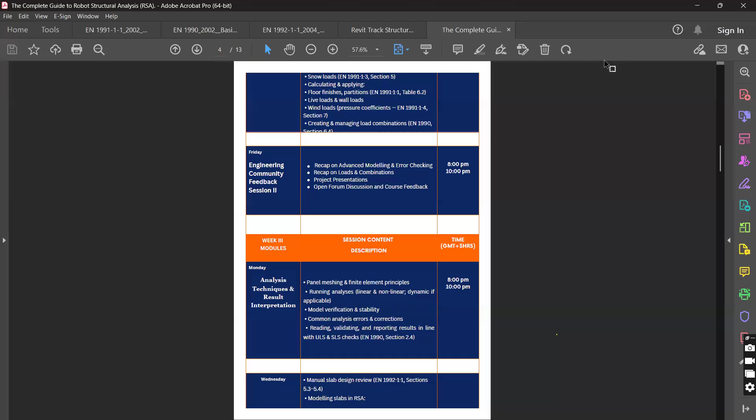Worry not about whatever you're seeing. So this is the Robot Structural Analysis software. I have 2026; you might be having other versions. It's all right. As we've said, it has very good advanced design and analysis tools. For example, if you're to go into buildings, you would use this purely for buildings, then frames and others.

But in most cases, with very complex structures that are composite in nature, having a steel part and a concrete part, you might find designers interlinking different softwares. And that is where the power of Robot comes in. There are softwares that only do buildings, and you can't use them to analyze moving loads or bridges, but Robot has all those capabilities.

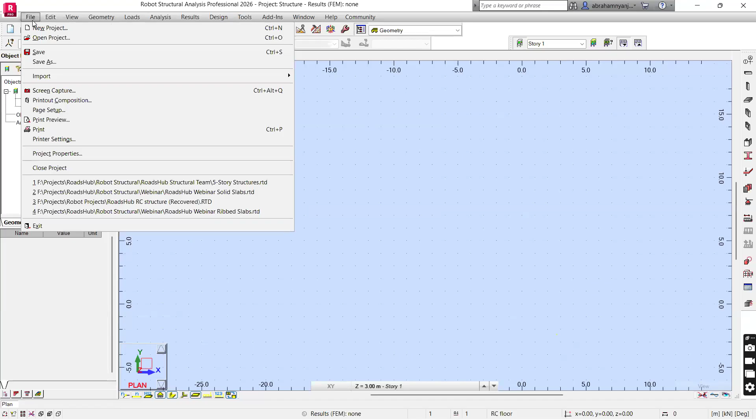Otherwise, for example, when you open a building and you want to model something that captures moving loads, you will never have moving loads within that. So you have to specify what you're going to design right from the start so that you have commands and settings that will match what you want.

Thank you so much. We shall have other engagements in future. We have programs that will be set. We shall cover concrete, steel, and move into various advanced components. So we shall be moving from one to the other.

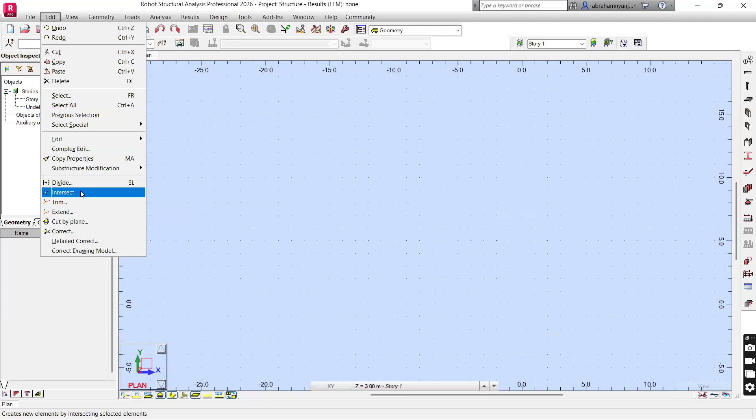So this is specifically if you're to work with a building. So the file edit is where you do the normal editing. You can copy, you can move things, you can divide, you can intersect, you can trim. So this is basically an editing. Whatever you want to edit, this is where the editing is done from. Whatever you want to edit in your model, it will be done from here.

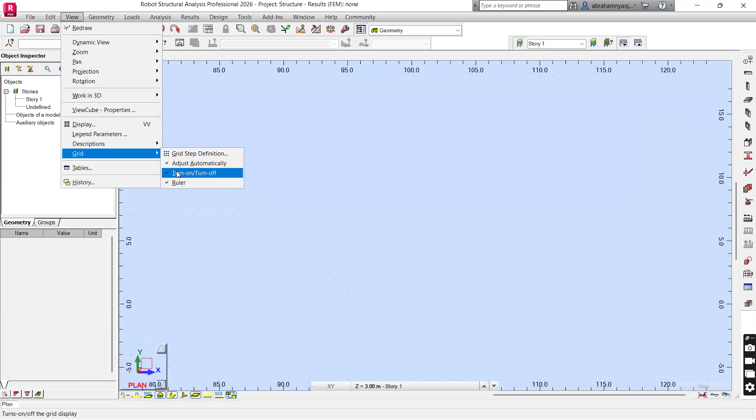So from the view, you can zoom, you can pan, but what is most interesting here, for example, if I come to grids, I hope you can see the small dots. Yeah, so you might not want to see the small dots. So this is where you get to turn them off, so you have a clear model space. The same applies to the ruler. You can turn it off from here. So this is where you get to change a few things within your model.

But as I said, the geometry, this is where all the modeling is done from. And because, for example, you can't place a column, then again come back to the geometry so that you pick another entity. That is why all the entities within the geometry are all right here. So you can see these are the grids, these are the beams, columns, floors, walls, openings, all of them. Most of them are right here. So instead of going back to the geometry to pick something, all you do is pick whatever you want right from here.

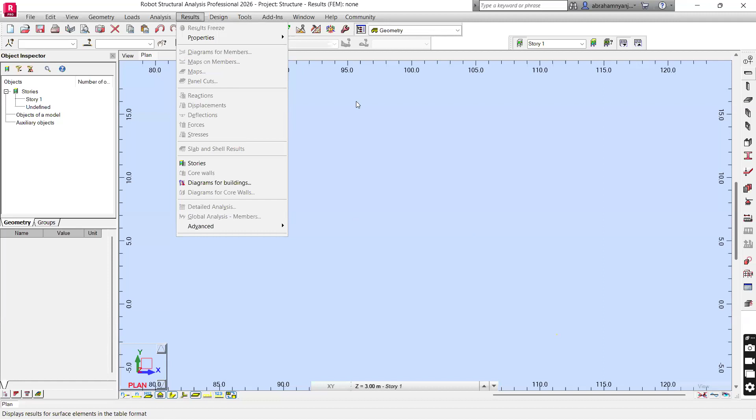Yeah, although the geometry is where we model from, all of them are available here to our exposure for faster modeling. So these others, I'm not going to go to them because you can see they are not activated because we have nothing in the model space, but we are going to see them one by one. And as we model, they will get activated.

In the tools, I'll jump these four because we are going to see them, worry not. In the tools, this is where you find the dimension lines you might want to dimension. And most importantly, this is where we get to change a lot of things. For example, if I go down to the preference, you can see you can change the language, change it to Chinese, but it depends. Your language might not be here, but this is where you get to change the language. These are the general parameters, and you get to organize the toolbar.

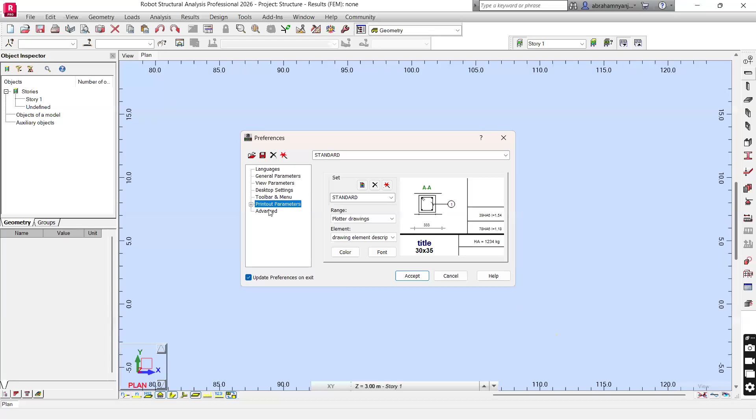What is most important in the tools is the job preference. Now, in the job preference, as we said, Robot is a very advanced software. It has over 70 design codes that are captured. Within the job preference, this is where you get to change the dimensions. You can see, as per the last settings I used, the structure dimensions will be in meters. The others are in millimeters, reinforcement in square millimeters, then the force in kilonewtons, meganewtons.

And now the database, for example, for steel, it is set to use the UK sections. There are vehicle loads, as we said. There are other standard loads, building bolts. And now when you come to the design codes, you can see steel, aluminum. If this is not the code you want to use, you don't want to use maybe BS or Eurocode, you can choose any other, for example, timber. So you can choose something else depending on the design codes you're working with.

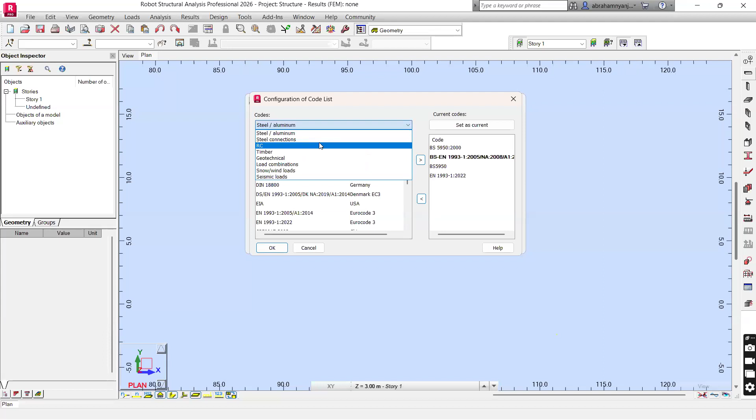For example, reinforced concrete structures. You can change depending on the code you want. So you can adjust, and then when you click on more, as we said, there are very many, so you can look for the specific code that matches what you want, for example, aluminum, reinforced concrete. There are very many. I'll leave them set as Eurocode. So tools, this is where you get to change the codes.

So now there's something I want us to model so that we make this interaction a great experience. So I have something small here. It's a structure.

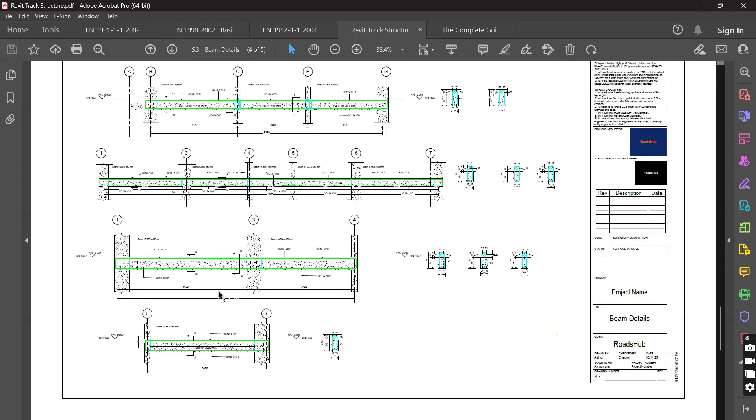It has columns of 200 by 500. It has beams of 200 by 450. So we are going to just try to replicate this within the shortest time possible to just show you the power behind Robot. So I'll go back to,

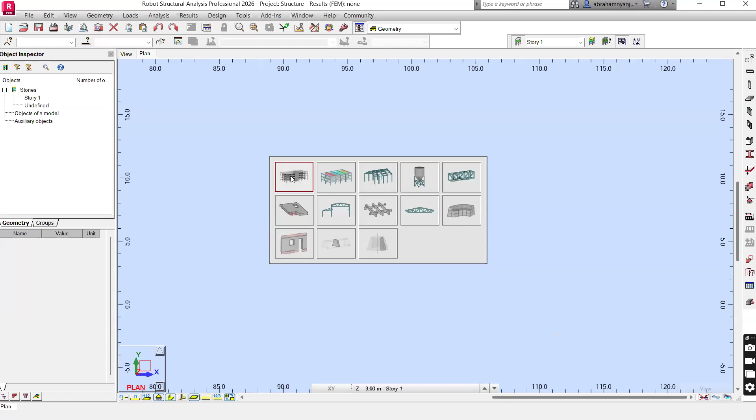So now every structure, as you've seen, it has grids. So as we said, when you go to the model, this is where you get to adjust everything. For example, if you're still not sure of what you selected, you have a chance to change it again. Geometry, then the structure type. You can change it again to match what you want. The axis definition, this is where we get to define the different grids.

But before we define the grids, because that is going to be our basis, I'm going to first go to stories so that I set the story height. So this is what I last used. You have your building base set at 0, 0. This will be the base of your structure. So you can define stories graphically or manually.

So for example, when you choose manually, you can set the story height depending on the structure you're going to design. It does not mean when you open the software you have the 3 meters. No, it will capture the latest modifications you did. So depending on what you have here, all you have to do is to delete whatever is there, put in your story height, then you just add it and you set it.

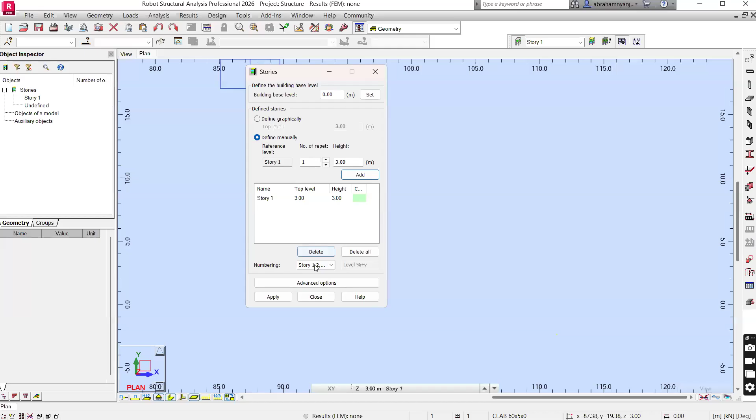So what Robot does, because even if you have 20 stories, all you have is to set one story, model that, check it. If it is okay, then you can use that story to generate all the other stories you want. So if we set it at 3 meters and you're good, just apply and close. So now what the axis does, for example, when you come to the Z, this would be the story height. You can see it is in gray color because it is already set within your stories. So now all we have to set is the X and Y.

But before we do that, you can see there are very many axes that you can use. I think most of us are familiar with Cartesian. There is cylindrical where you get to specify the angle, the radius, then arbitrary where you can just pick points. So using the Cartesian, we have the X and Y. Now, depending on our structure, this is where we get to define the X and Y. So literally what we are going to define are the different grids, representing where we have main elements.

So I'm going to be minimizing because I didn't open this meeting using the Zoom link. So I find I can't navigate easily.

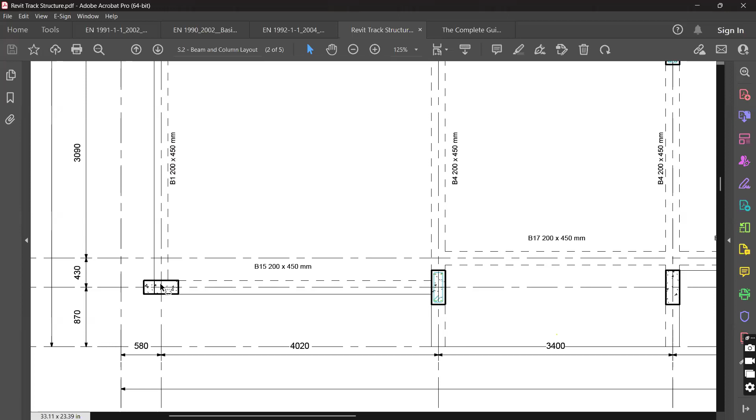So this is what we are going to do. This is the structure we have. I'm going to set the 0, 0 X and Y at this location. So if I set the 0, 0 as this point in Robot, all these ones in the X will be positive, and whatever is in the X on this side will be negative. For example, this 580 will be negative if I set my 0, 0 here. So all these grids will be in the positive, this one will be in the negative.

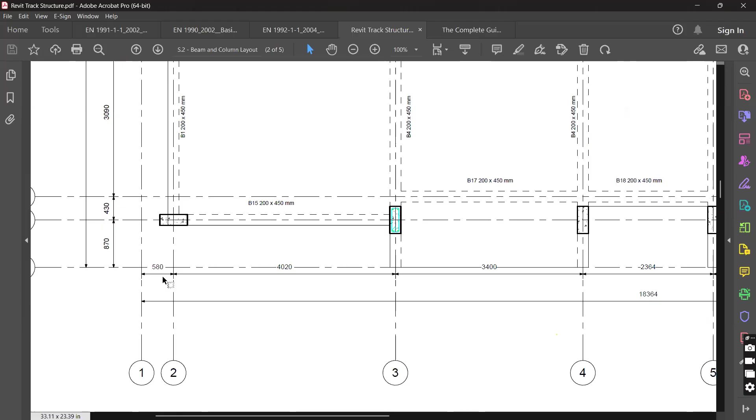The same applies to the Y. Because I've set my 0, 0 here, the 430 and the 3090 will be positive, and the 870 millimeters will be in the negative Y. So this is what we have. I'm going to try to duplicate it. We have a 4.02, a 3.4, a 2.36, 3.4, then the 580. The same applies to Y: I'll have a negative 870, then positive 430, 390, 3090, like that.

So these are the grids I'm going to set in Robot, because you set them at once and then you're done. All you do is to place the elements. Okay. So this is Robot. So we have X. We are going to add a 0 so that it marks our 0, 0 coordinate, and they're going to be numbered from 1. You can change to different numbering that you want. So we shall number the X from 1, and we shall number the Y using A, B. So X, we've set the 0.

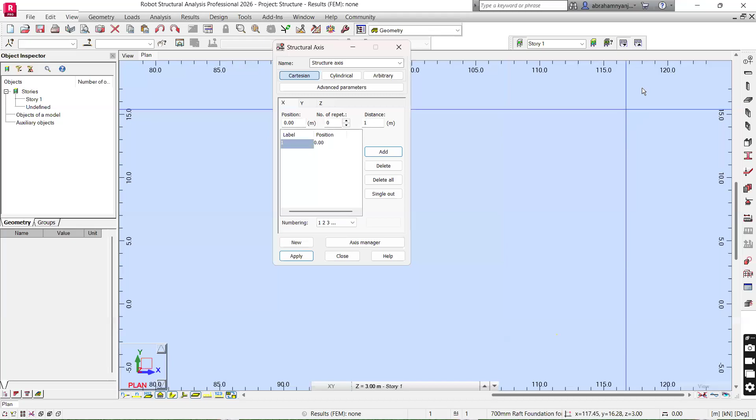So what I'm going to do, let me just toggle this so that I'm going to have a positive 4.02 from my 0, 0. I'm going to add a 3.4. I'm going to have a 2.36. Then a 3.4 will repeat. So it is symmetrical along this axis.

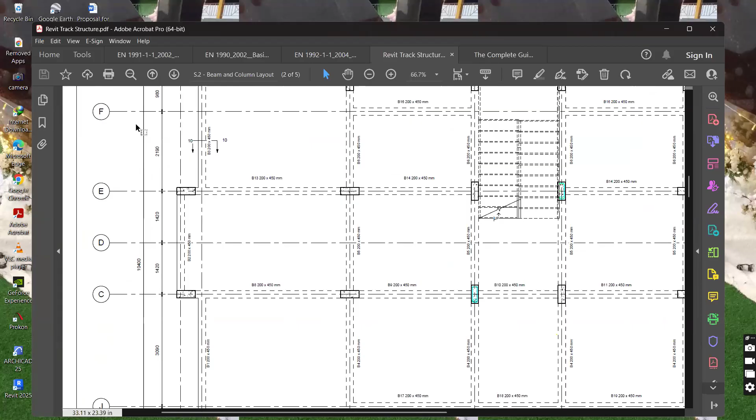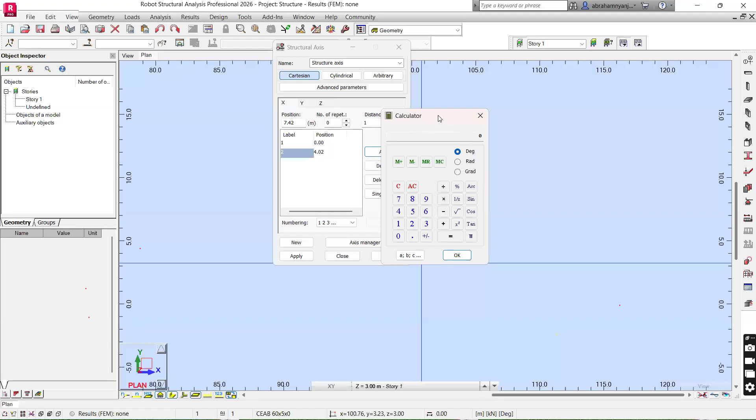So X00, I'm going to have the first, which is 4.02. So all you do is type in the next distance where your grid is, which is 4.02, and you add. But now to add the next grid, because it is in increment, all you do is double click here, the calculator will pop up. So now we've stopped on 4.02. I will add the next grid, which is at 3.4. So I'll say equals, then press OK. Whatever total will pop up here, and then I will add it. I'll get the next grid.

The same applies to the next, that is at 2.36. I'll get the 7.42, I'll add the next grid, which is 2.36. Equals, I'll get the total, I'll press OK. It will automatically populate here, then I'll add the grid. So we've passed the symmetrical point. I'm going to add the 3.4 and 4.02 from where we've ended, the 9.78.

I understand there are people that can add with their heads, but you just press OK and it will populate here, then you will add it. So I'll add the 4.02 to the 13.18, just like that, equals, OK, then it will populate here and I'll add my grid. So I'm going to add the last one, which is 0.58, from where we've ended, the 17.20. I'll add the 0.58, get the total, okay, it will populate here, then I add it. You're done with the X.

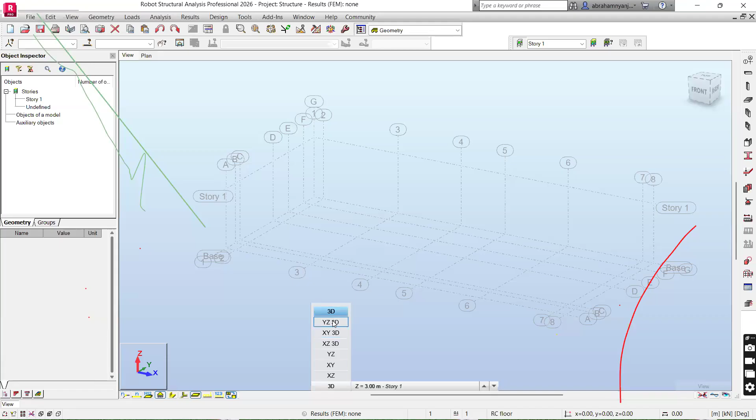And you can see there are two views that are open. I will be explaining more on this as we work. So there's one that is called view that has the 3D part. When you come down, you can see we have the stories we set as 0 and 3 meters. But now within the 3D, you can access the XY, the Z, you can access various planes. Now this plan is more of the XY. So if I go back to the view, I can work with XY.

It's still the plan, though with this I can easily navigate between views, or you can use this cube to navigate within different views. Using this cube, you can rotate and do all the magic you want. You can use the cube or you can use the XY and the 3D.

So now these are the grids we created. As modeling is done, we shall have columns, beams at this floor, then we shall have floor slabs on this. So let us work through that very fast. To model a column, I'll go back to the plan.

To model a column, for example, if I want to place a column at the intersection of this grid or this, all you have to do is launch the column. Remember, you can launch it from here, or you can go to the geometry and launch the column. It's still the same. You can launch it from there, or you can just go to the columns here. It's still the same command.

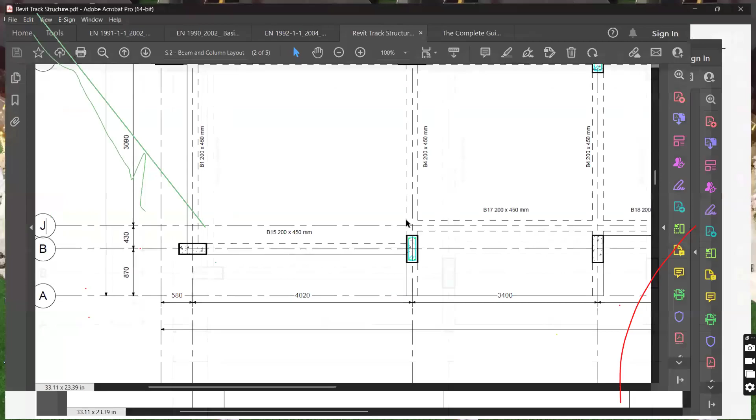So we are going to place columns. This is the grid that is set at 0, 0. So we have a column here. We have a column on this axis, a column here. So we are going to place these columns. We have columns at this axis. We have columns here, and so on. And all the columns are 200 by 500.

It does not mean every structure you get, you will have something like this. You probably will have an architecture drawing from an architect, you might have proposals of the locations where you want certain columns, and still he might propose the different dimensions he wants. He might not want a column to protrude out. He might want a column maybe to protrude at a certain point in order to communicate the different views that you want. So it's not necessarily that you have this.

You will probably start from an architecture drawing and then position your columns, and then you have something tentatively to work with depending on the position of the columns you have decided, and then you begin from there. So we are going to begin at this point, but in real world, you won't begin at this exact location. So we are going to place columns here. There is a column here, and here, then at different grids.

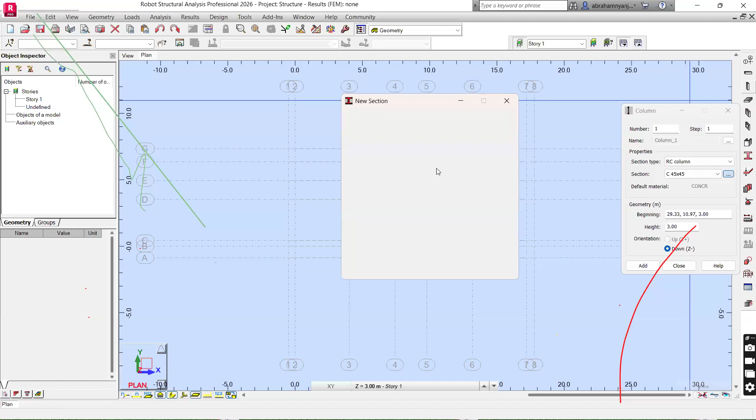as you are aware, Robot is integrated with Revit, so every element has to carry a certain section. So we already have a section of 200 by 500, but I'm going to show you how you create yours, because you will not have that. So all you have to do is you click on this ellipsis button, and this new section will pop up. So we are modeling a reinforced concrete.

Material is concrete. You can specify its class from here, or you can specify it later on through the object inspector. We shall see how you can adjust a few things, but we shall take C20 for the start. Still, it depends on the structure you're modeling. All these come from the different specifications. During the training, we shall dive deep into where all these come from.

Because, for example, I will apply loads at a certain point. We might not go deeper into where the different loads come from in Eurocode, but that is covered in our training. So as you can see, you can choose different circular, different columns that you need. So we have a B of 200 and H of 500. And as you're aware, B and H, their ratio governs how the column will be designed, whether it will be designed as a column or as a wall.

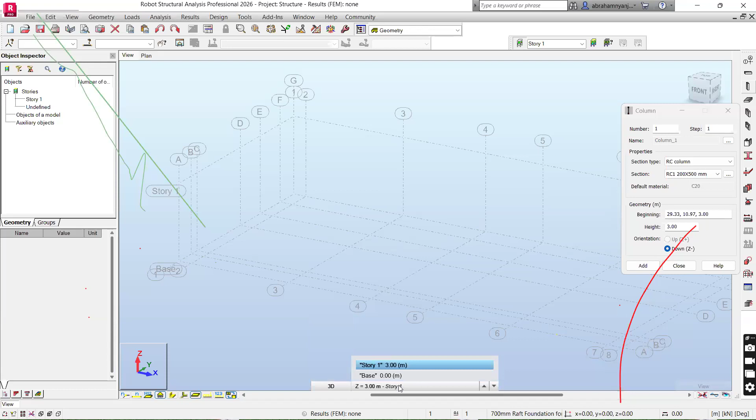So with this column and in your plan, as I said, where you model is very important, because, for example, when you go into view, it has very many views. So you need to know exactly where you're modeling and the story that you model. For example, we are on story 1 and we are in the plan, all in the XY. Okay, so all I have to do is specify the beginning, and as you can see, the C20, then the height is already set. Remember the story height. Then the orientation is the negative Z.

For example, if I place a column here, you can see it has been placed. So it will be placed at the grid intersection. And note, I guess you see that rhombus. The rhombus, the circle, and the triangle are critical in Robot when you're modeling. You know exactly where you've placed your column, so I'll just place it at that and that. So I'll place this one at this location. So this is how they have been placed.

We are going to see how you can orient them further. So now that you only have grid, you only see the rhombus, but as we model, you're going to see other entities coming.

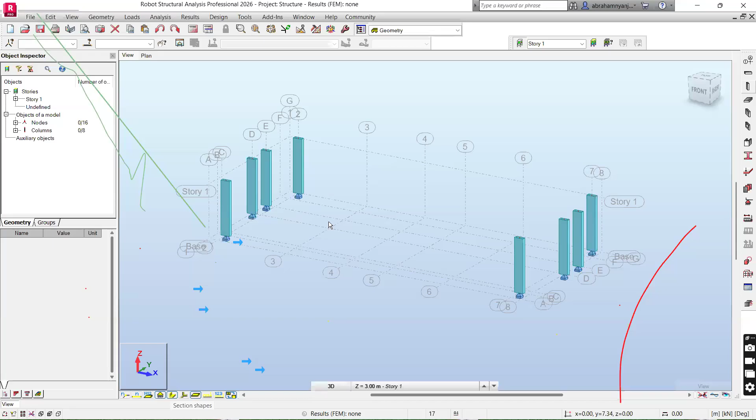Now, to see the section properties, all you have to do is click on the section shapes. And this is what we are modeling in 3D. So I'll go back to the plan and continue placing the columns. Remember, you don't need to go back to the geometry. You can just pick the command from here. So I'll just confirm it is still set on reinforced concrete 1, and I'm going to pick these points.

Okay. I don't remember exactly where we had columns, but it's all right. We can change that later. It's okay. We can change these ones later. So I'm just snapping. The moment I move next to the grid lines, the rhombus will show up. Then I'll be able to snap. I'll go back to the 3D, so this is what we've done. I've placed columns at different grid intersections.

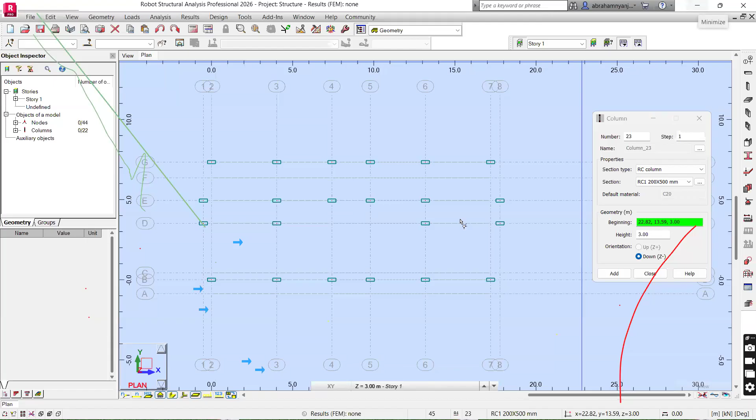So I'm going to go back to the plan just to confirm what we have. So we have a staircase here. This grid has no columns, yes, but this one has, and this one has. So, okay, we shall change the orientation later, worry not. So I'm going to go back to Robot. I'll place this one here and this one here. So these would be your columns in 3D.

Remember the base we set, it automatically captures this support because we set our base as 0, 0. So Robot understands that where it finds your base, that is your 0, 0. So it will just automatically attach a support. But of course, as you do analysis and model, whatever footing you model will also operate automatically within your base. So if you analyze the footing and finalize its size, it will automatically come and populate here.

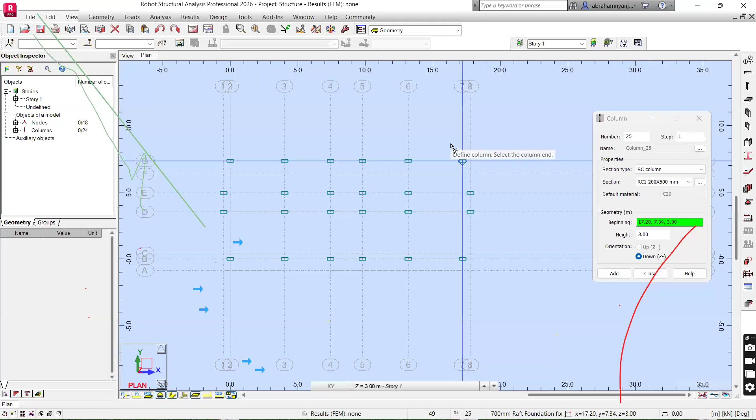Excuse me. Yes, engineer. What happens when the column is slightly away from the center? How would you position it? When the column center is not in line with the grid center, I mean. Yes, we are going to cover that because the drawing I'm using covers that. It is not in line.

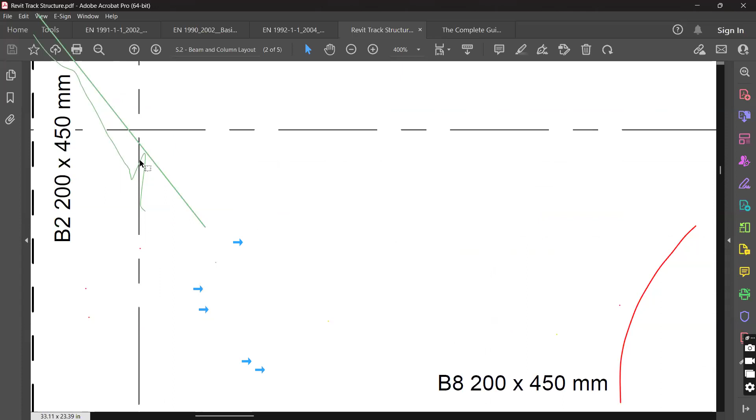So as you've seen, we've randomly positioned columns, but this column actually is not at the grid intersection, like what the engineer is asking. Because you don't have a grid at this exact intersection of the column, the grid you have here, you can first position it here, then you can use the edit commands and move it. We are going to move them, worry not. The same applies to these columns. As you can see, they are flashing. But we have initially placed them at the grid intersection.

So to do that, or before we do that, we can first... Because for example, these columns are positioned like this. So these ones, I'm going to change the orientation of these 4 columns. The same applies to these 4 columns and these ones. So I'm going to change their orientation, these columns and these ones.

As we said, you can do edits on your drawing. So I will close this to change. For example, these columns are not oriented in this position. They are meant to be in this position. The same applies to these ones. Because for example, on story one we have columns, but those are all the columns. So this is where the edit tools come in.

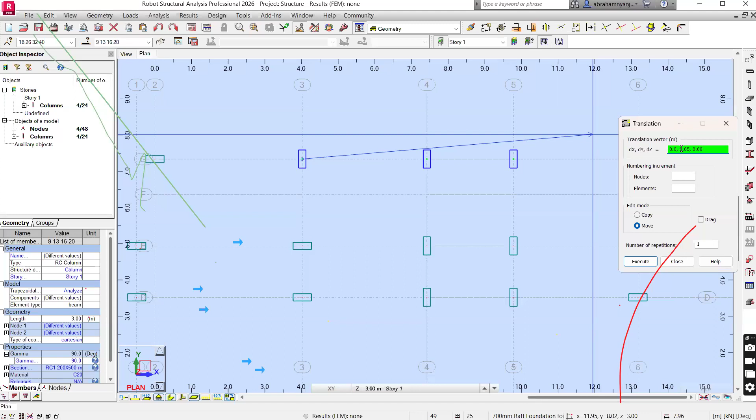So I'm going to just right click and just put a 0, 0.05, then I think it's a negative, 0.00. I'll just come back and give it a negative. Then when I click execute, as you've noticed, the columns now move so that they intersect. Now, when you come back, you realize the translation vector is no longer 0, 0.

Now, the same applies to these columns, because you can choose to move one by one, but they are 4 in the same direction. I will just highlight them at once. And please note, when I go back to the view, you can move these in the 3D view. But for example, when you select this column and move it, you'll be able to move them, but you'll find you have very many points to snap to, because this is 3D. That is why I'm doing the editing from the plan, where I have the X and Y fixed.

So all I have to do is select these 4 columns. I want to move them inside by 0.05. So I'll come to the move, make sure I have the move toggled on. The translation vector, when you click at this location, still captures the 0, 0, but I want them to move inside. So you can see the Y is now positive. So I'm going to keep these as 0, comma, I will have the 0.05, the Y translation vector, then I'll keep this one constant.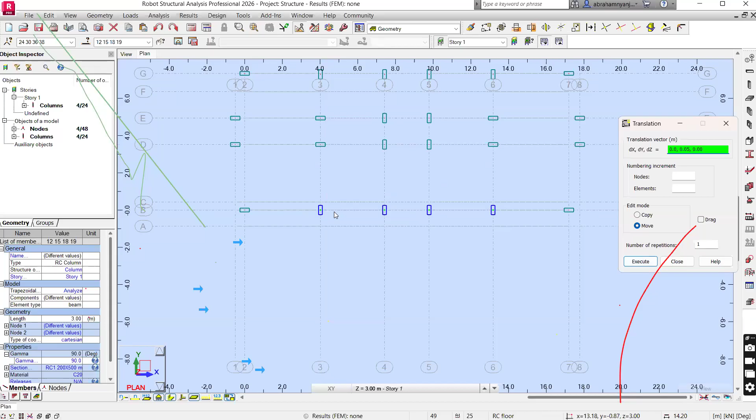When I click execute, watch these ones, they are going to move. So I'll click execute and they'll move inside. So this is how you reposition them. Note when you do this repositioning from the 3D, you might move the column and not move the pin support. So you have to highlight everything, including the pin, before you move. But when I do it in plan, it is easier. I can move them very fast. So the other columns, we would orient them, but I'm going to just keep things brief.

We can't fully exploit the power of Robot in just a 2-hour session. So I'm going to move on, but these you would still move and align them very well. So to position beams, you have to note where you are. We are at the first floor. So we are literally at Z, which is 3.0, we are up. So if you draw them at the base, they will reflect at your base.

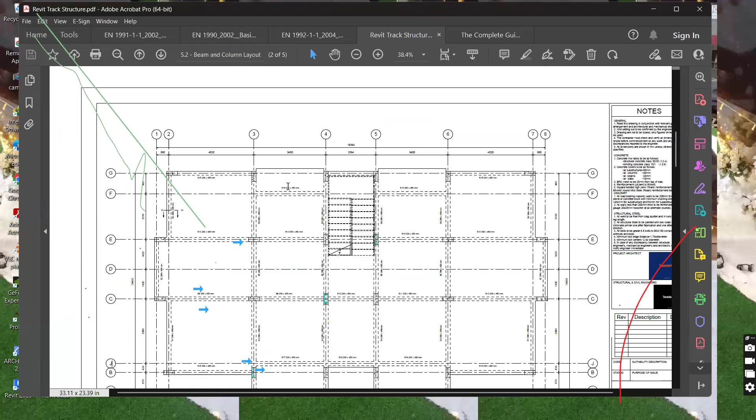So I will just open, so these are the beams we have. They are 200 by 450. I'm going to sketch them. You can see how they move. These are cantilevers. So let us sketch. Now, for beams, as we said, you can pick them from here, you can pick them from geometry. But instead of going to geometry to launch a beam, you can easily launch it from here. So I will launch beams.

I'll launch beams. What we did for the columns, it's still the same. You will choose the reinforced concrete beam. Okay, it's there, but it's still the same process. You will have to come to these ellipses so that you can choose the beam you want. The 200 by, you choose the concrete. I'll go with C20. All these can be adjusted as you model. So this will be 200 and this will be 450. I'm not going to do it, because the beam is already here, 200 by 450. But you would just put your 200 and your 450.

Every time you input something, if you double click, the calculator will pop up. If you need to calculate anything, you just double click wherever you input something, and the calculator will pop up. You change its label and you add it, it will pop up here. So I'm going to just select the reinforced concrete beam. This is C25. So now it has a beginning, it has an end.

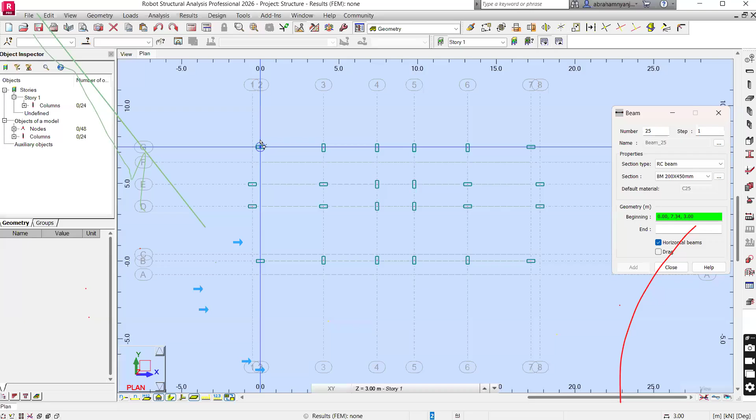Because you're modeling in a software that has the 3D part, just because we are in the XY it might not look like it, but it's right there the moment you go to the view. So all you have to do is to choose the start and end. Remember, this is a horizontal beam, so it will draw it in the horizontal direction. So all I have to do now, don't just snap, because remember, the circle is the node.

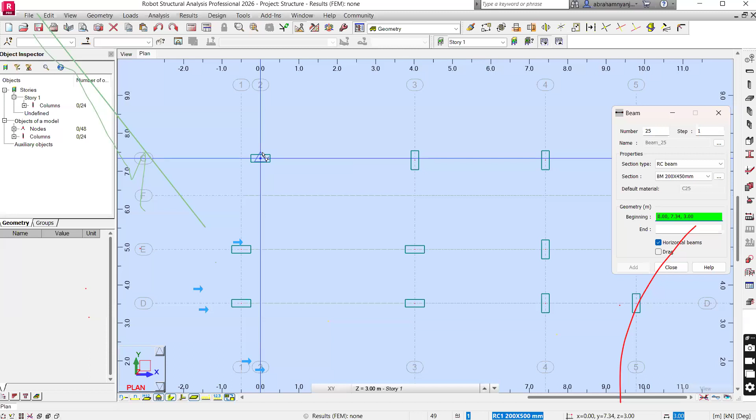The triangle is the midpoint, the rhombus is the grid. So I will just snap to the grid and snap to this one. So a beam has been input. I will snap to this, snap to this. Because the beams are the same size, I will not change, but it does not mean the project will have the same beams. You have to generate all the different beams that you have here.

So I'll just wait for the rhombus, then I'll sketch. Wait for the rhombus, sketch.

If you just sketch, because Robot is a finite element software, in simple terms, finite element, if it's a slab, all it does is divide that slab into very finite elements that are known at a certain x or a certain distance. Because basically, if you have an unknown function at infinite points, just imagine you have your x and y, and you have a curve, a function that is unknown at different values of x.

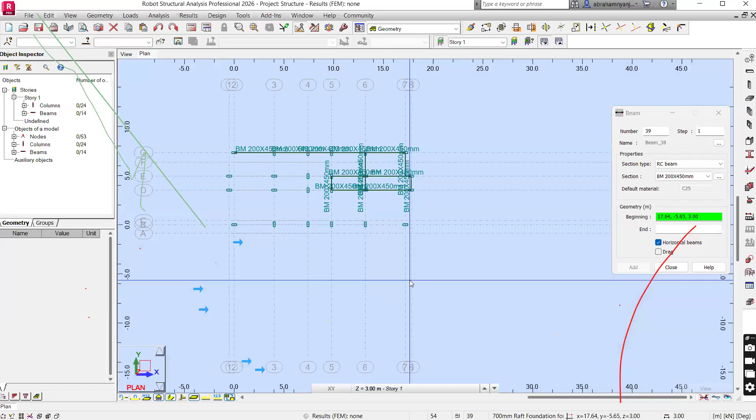So I will just wait for the rhombus. You just navigate over a point, wait for the rhombus, and snap. So if we go back to the view and we go to the 3D, this is basically what we are doing. These are the beams I'm sketching. So I'll go back to the plan. So let me try to sketch very fast. So I'm just waiting for the rhombus. You just navigate over a point.

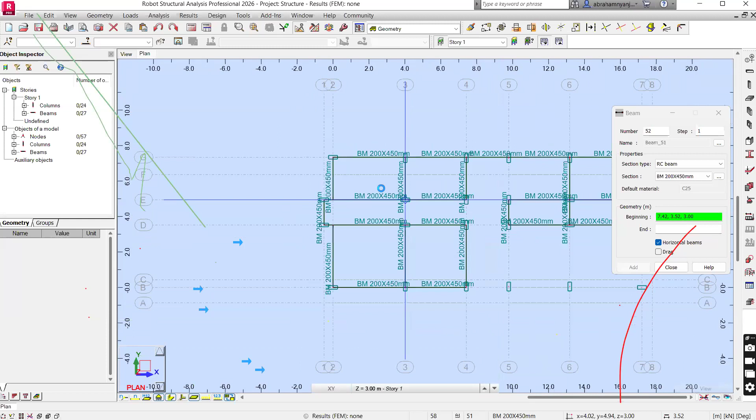Because I know where the rhombus is, that is the grid intersection. So you can zoom in and get the point. Remember, as you also get near. So worry not, because we are modeling at a faster pace, you might have some few warnings that can be solved. That shouldn't worry. Because if we don't have beams complete, then the floors will also not be complete. So these are the beams now that we have.

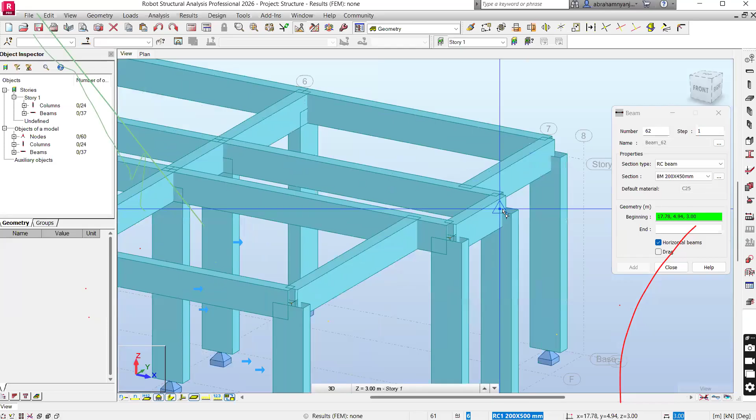Just opening the 3D. So these are the beams. But as you can see, their flange is attached above. But because they are in the same story, I can select them from here. So if I have all the beams selected, I want their flange to be attached here. I don't want them to protrude above, because this is where the slab will be attached. This will be like upstand beams, which only appear at floors or where you specifically need them.

So to change this, you remember where we changed the angle from? When you come here and come to the offsets, there is lower flange and upper flange. For example, when you choose lower flange, you can see they have moved up. They have attached it using the lower flange. So when you check, as you can see now,

I have a notification of internet. So in case you're unable to hear me, let me know.

But all I have done is to move them so that they are flush with where our story stops, the 3.0. So this is what we have. I can go back to the view and go to the XY. So this is now what we have. So to move from this step, we need to do the slabs. The moment you use Robot over and over again, you see how it flows, because everything is done from geometry and everything is toggled here. So floors, those are the different slabs.

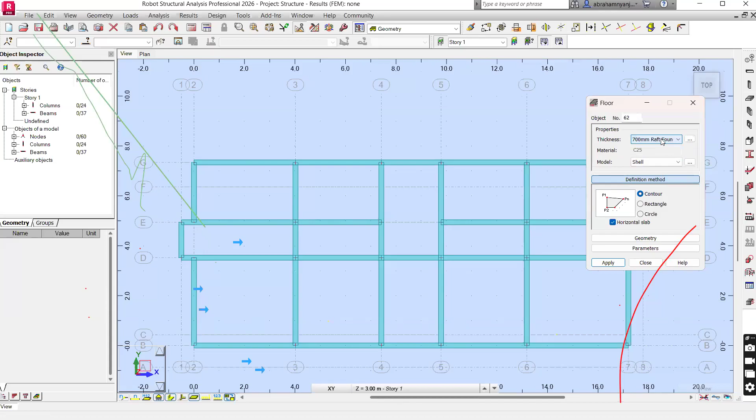So when I launch the floors, as we did earlier for beams and columns, make sure of the thickness; there is shell, you can model them in different ways. The same applies when you come to the floors. So this is where you get to specify exactly what you need. So we are going to have a combination of a solid slab and a ribbed slab, just for demonstration. So I'll go with 150. It's constant thickness. I will change its label to 150 millimeter thick solid slab.

So now what is critical is to uncheck the parameters for foundation elasticity, because if you don't uncheck, Robot is going to capture this, because this is what we use to model foundations that are in contact with soil, or raft foundations, slabs that are in contact. So if you don't uncheck it, it will assume this to be a slab that is in contact and it is modeled differently. So I'll just click add, and you can see it has been added.

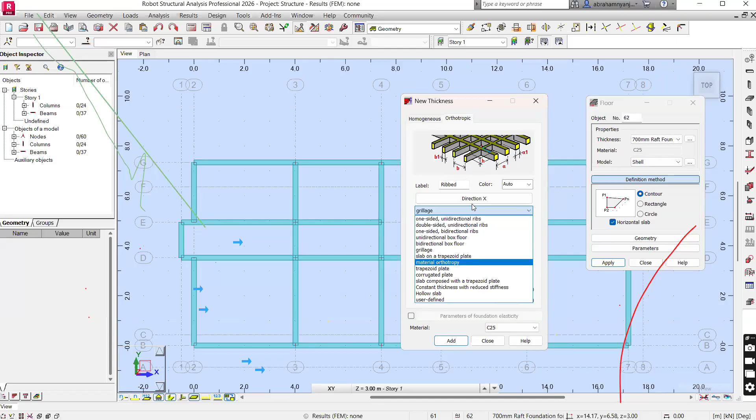the different entities that you want to adjust. So this is where you can see this is one-sided, ribs in one direction. You can have unidirectional, you can have on either side. So anything you think about, you can be able to model it here. So I'll just leave them as one-sided. And then you just add, they will be added, and close.

So all you have to do is select, for example, I will start with the 150 millimeter thick. Make sure this is shell. Now, you can model it using a contour, meaning you have to specify all the points. You can use the rectangle, which is faster. So I'll wait for the, remember what we said, it is critical, so I can do it from the plan. So I'll wait for the rhombus, first point, second point, because I'm using rectangle. When I specify the third, the slab is modeled.

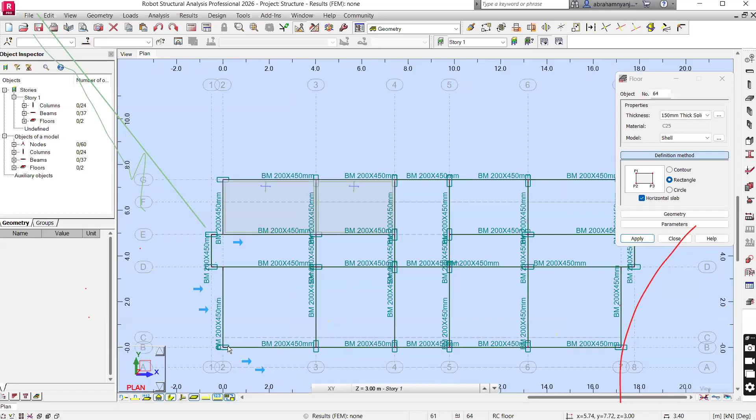Now, because you will later on do reinforcement, the direction by which you model the slabs matters. As you can see, I'm following the clockwise direction. I will just toggle this on. So this is the local axis. Every element here has changed the direction. For example, this is XY, and this is also tied to the reinforcement. The reinforcement will be specified depending on your X and Y plane. So you should follow one direction.

If you choose clockwise, then this will be modeled. They will have the same local axis. The moment you change and model it anti-clockwise, you have oriented it, and you have an effect on the reinforcement, because you might put reinforcement that is meant to be in the X plane and you put it in the Y plane because you interchanged the slab.

So we have a staircase here. I will leave that open. So all you have to do is zoom in, get the rhombus, and model. As you know, a slab is supported in different directions. So, oh, that was a node. I think that is where we shall have a small error, but we shall adjust that. So I'll model these ones.

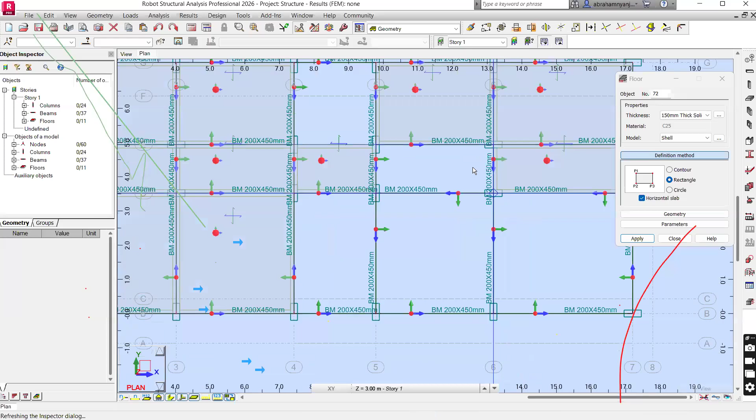What is critical as you model? Note the signs that appear. The circle, the rhombus, the triangle are critical. And slabs follow the same orientation, so that when you have reinforcement in the X, you don't change and put it in the Y. So you see me slightly moving away. So I'll close this. We shall go back to the 3D and we shall see what we have modeled.

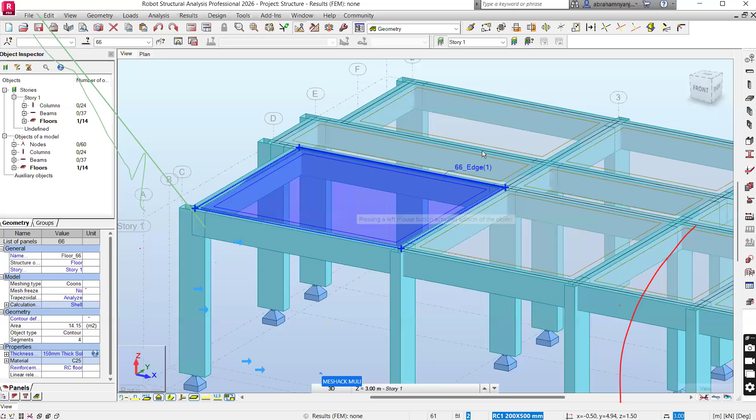So there's a slab here, but we have used only solid slabs. I'm going to turn off these axes. I'm going to just delete this and have it as a ribbed slab, just for demonstration. So I'm going to change this to 150 thick ribbed slab.

Oh, this is a contour. So for contour, you have to click on all the points and then you close it from where you started so that it captures it. So using the contour. The rectangle, you only need 3 points. So this is basically what we have done.

Yes, as I said, we can't exploit Robot in just... I'll leave a few minutes, so I'm going to apply loads, then copy these to all other floors that we want. So I'm going to go back to the XY, or you can use the plan.

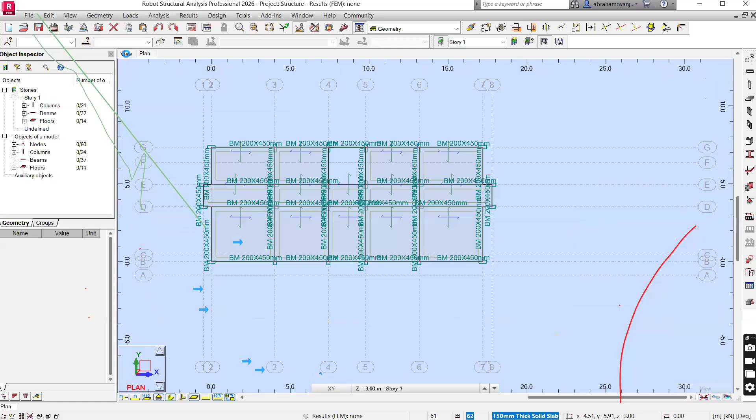They are both. So to apply loads, you have to first define the load types. For example, dead: always we begin with self-weight. Robot automatically calculates the self-weight of all you have put. So dead self-weight, you add it. The moment you add it, all the structures, all the entities you have, their self-weight will be captured.

So we can have finishes. Finishes is also a dead load. So we can have finishes, we add it. This one we shall specify. Then we shall have different partitions. You can have partitions on beams, partitions that are directly... they are all dead loads. So partitions on beams, and we can have partitions that are directly on slabs. For example, where you probably have bathrooms, you might have partitions that are directly onto slabs.

So we can have live loads. If we assume this to be a residential building, we have a specific residential live load. So I've turned the nature into a live load, residential live load. As per the code, you have a specified residential live load. We have the wet areas, then the saturation. Wet areas, those are the different washrooms, those are the wet areas.

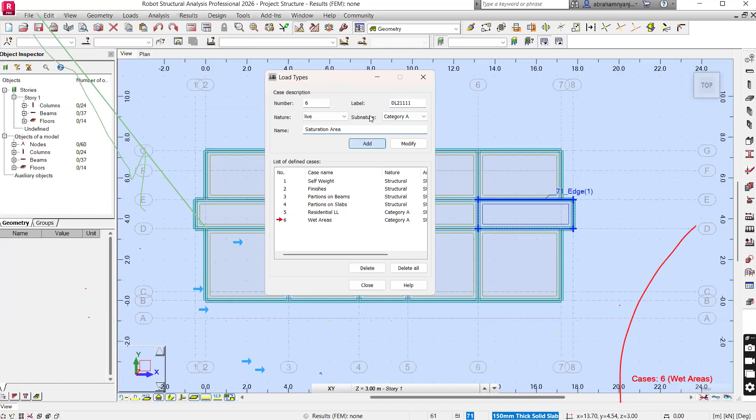Codes give them different live loads. The same where you have stairs, where you have floors that have balconies. So the codes give them different saturation areas. So the moment you're done, you have now specified your loads.

For example, when you come here, you can see that now after specifying the loads, you move to the load definition. Now in the definition, this is where we get to apply the loads. You can pick it from here, or the moment you come here, you can see the load types we've been working on. You can get them from here, and these are the load definitions. So now this is how we get to apply the loads onto this specific floor.

Depending on the plan you have, you will know where the wet areas are. So I'll just assume these to be the wet areas, and on other floors, if we had cantilevers here, though we didn't protrude them, we would have cantilevers here so that it takes the saturation loads. But we have an access for the stair on this side, so we shall apply saturation loads here.

Now for example, self-weight is covered. When you get to finishes, depending on the codes you are using, some engineers use 1.0, some use 1.8. So finishes depend on the floor you have, tiles, colors, so that weight. And it's a surface load.

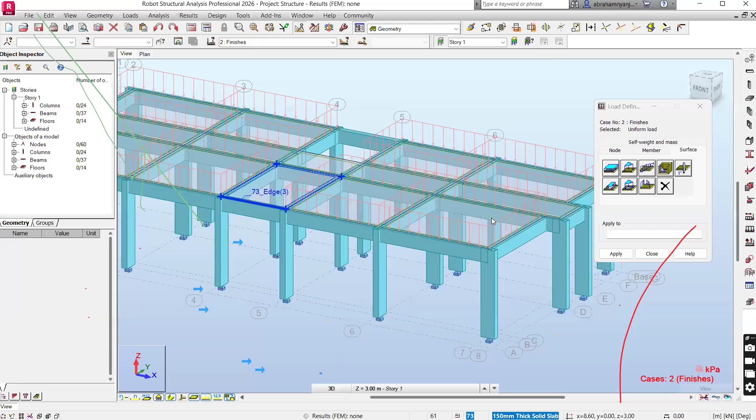I'll go back to XY. So all you do is add, and I will just click on this. Let me turn on the 3D so that these are the loads I'm applying. But yes, I can do it from here. Because it's a surface load, you just need to click on the slab that you want. So I'll go back to the XY, and you just have to apply it on the specific floors. Yeah, it's right there.

So I'll close this. I will then go back to finishes and toggle it. Here you can toggle the load symbol on and off, and you can as well show the value. So when you're done with the finishes, we can apply the partitions on the beams, where you will have walls on the beams, depending on the usability. For example, here we shall not have because this is an access, here we shall not have because this is an open area.

So at this location of the beam, you will have a wall, and that is the load that we are going to put. So all you have to do is first change it so that you go to partitions on beams.

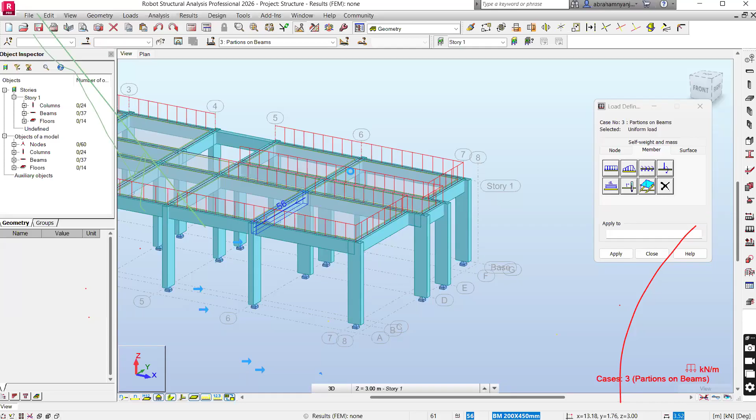This is how load application and defining becomes very easy with various software. So all you have to do is specify the member, which is the beam that has that specific wall, and the load will be applied. I'm going to cover something small. So I'll go back to the XY.

Now, after you've done applying the loads, you need to verify. You remember we had some that were not activated, but now they're activated because we've modeled a few things. So I'll save this just in case something happens. Keep saving your model, so in case of anything, you have a backup to start from. So you can do small verification before you eventually copy to other floors. And this is the meshing.

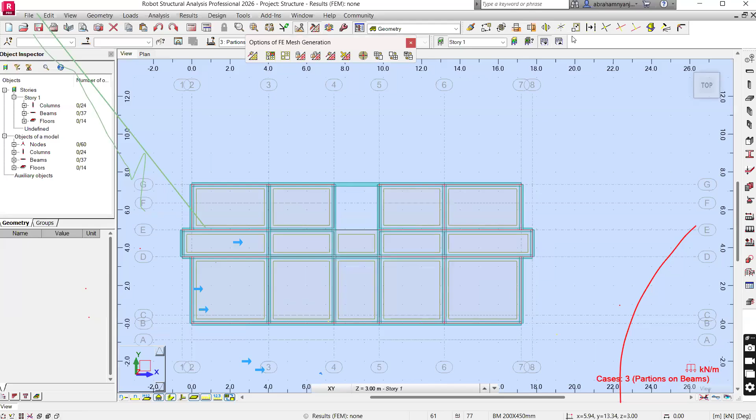You can pick it from analysis meshing, or, you remember the way we popped up the edit tools, there are other tools for meshing. So I can put them here. All those that you find here are all here. For example, the meshing option, there are no panels selected. Now meshing, I'll take, for example, 0.2. The finer you make it, the more data you have, the more accurate it is.

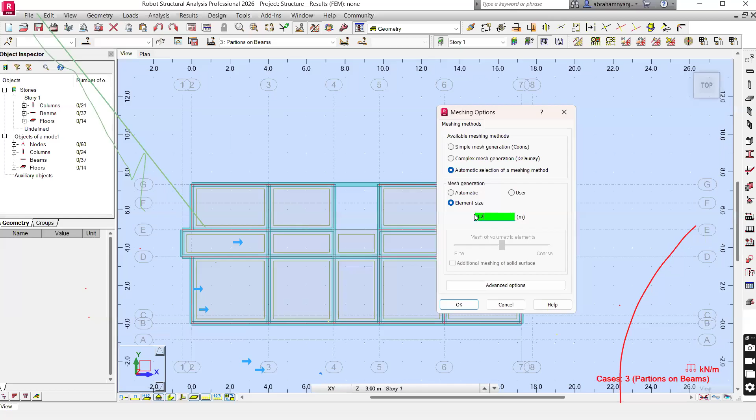The bigger you make the mesh, depending on the structure you have and the plane that you're working on, so you have to choose a mesh size. So this is 0.2 meters. It's going to create meshes. You remember finite elements. So it will have a small element that is 0.2 by 0.2 that it will analyze, and so I'll just keep that as 0.2.

So this is the meshing option. You can delete, you can freeze, and this is the meshing option that we got from this side. You can as well pick it from here. So I can do mesh generation. What Robot is going to do is generate a mesh, and this mesh will notify you where you have inconsistencies.

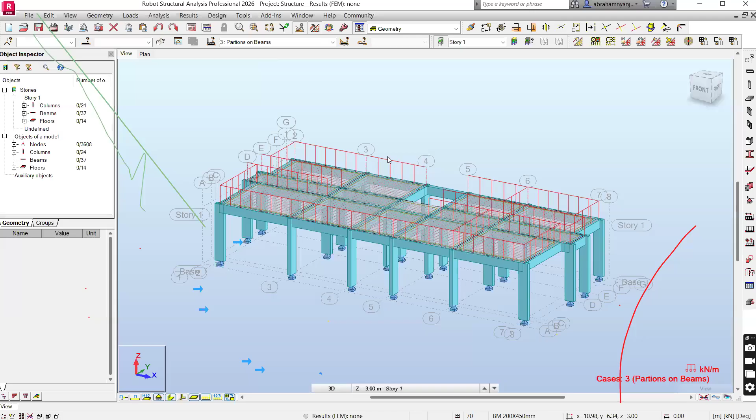I will just go back to the software. You will not have a clean mesh the moment you click on the different parts; it will not join very well. So this is the simple check you can do. For example, here we must have probably snapped to a point that is not matching very well. That is why it is not so clean compared, for example, to here.

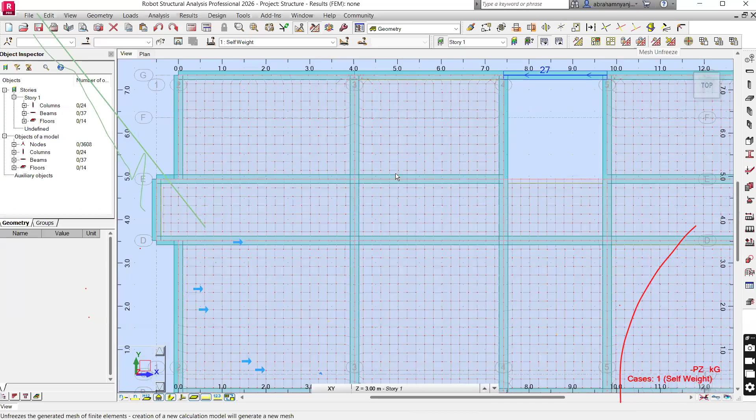So this is the mesh, and now Robot, if you're to analyze, will analyze every element separately and then combine them to give you results. So I will freeze this mesh so that it does not change in case of anything. To toggle it off, you just click here. So it will be there in the background, frozen.

Now with this, if I go back to the stories, this is where you get to create as many stories as you want. So you model the first story, make sure it is okay. For example, I'll just run a simple verification to confirm. The moment you have warnings, elements that have not intersected, Robot will notify you. So when you're done with the story and everything is complete, you have applied the loads, you mesh it, check it has no errors. Now we can automatically generate other floors.

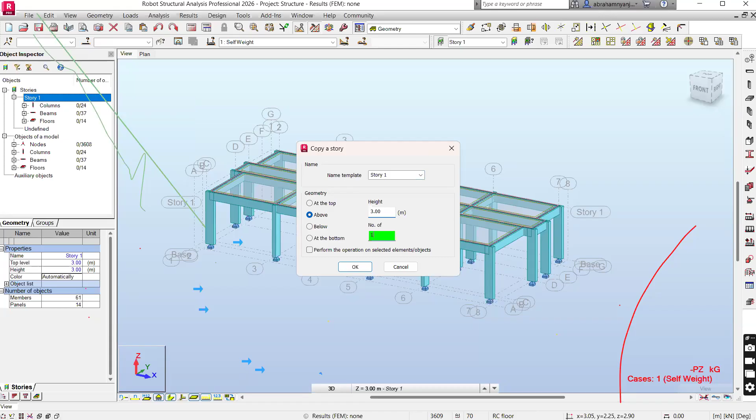So when you come and select this floor, you go to stories, you can copy floors. Maybe I can have 5 floors, so I'll generate 4 floors. So I'm going to generate using the floor that was okay, I'm going to generate other floors. That is basically what it has done. So I will just check out the filters so that everything pops up. So this is the structure.

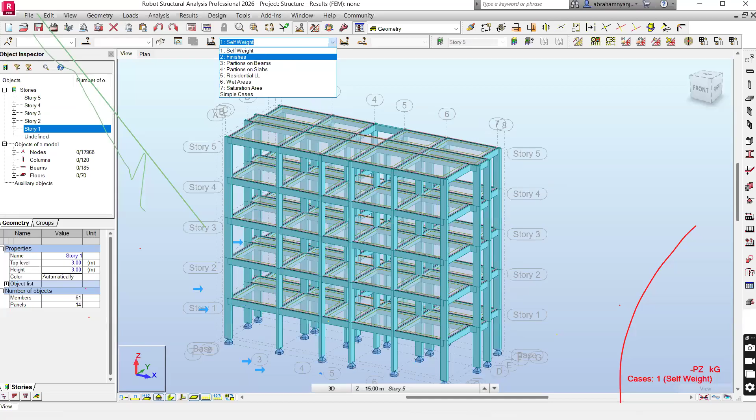It has been meshed, but you first work on one and confirm everything is okay. Then when you check it has no errors, then you auto-generate other floors. Now, all these other floors will come with the different loads you applied. So you don't need to work on these other floors. In the interest of time, although it is interesting, I'm just going to open a project just to show you something small.

So this is how a complete structure would look like. If, for example, I was to just pull out one floor, because it is very possible. So I can pull out one floor, maybe I'll pull out the beams for this floor. So I'll just pull them out here. So this was a beam for the staircase. It is on the other floor. We can uncheck it. I can just show you something small.

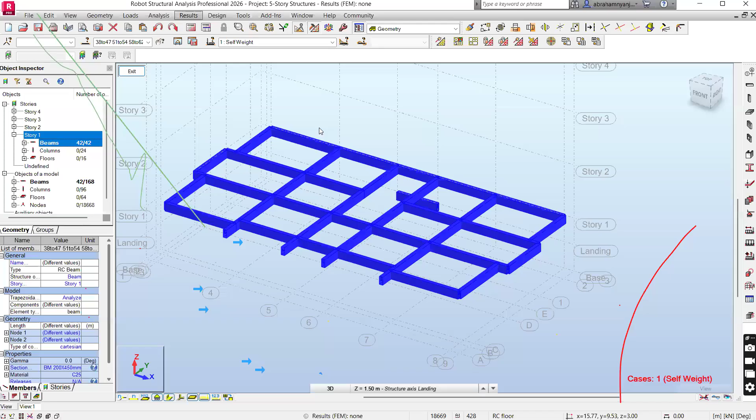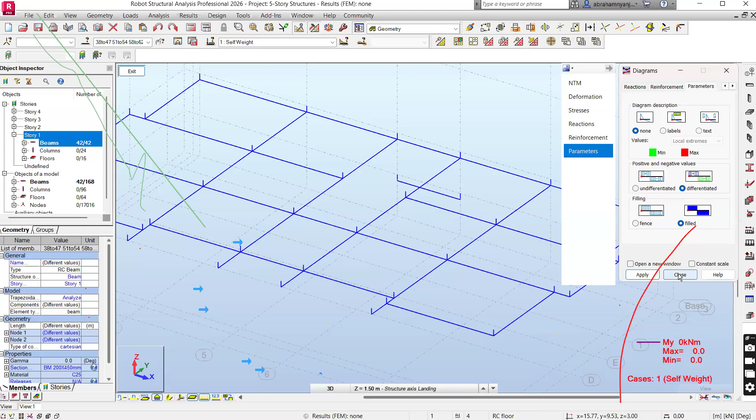Okay, I think I had not run the iteration for this. I had not run iteration for this. Yeah, we don't have results for this, but it's okay. So this is how a complete structure would look like. I will just exit this. We can do very many things, wind simulation in Robot and so on.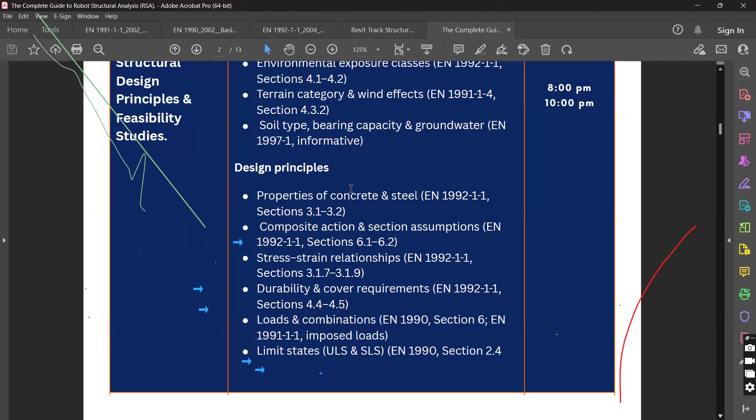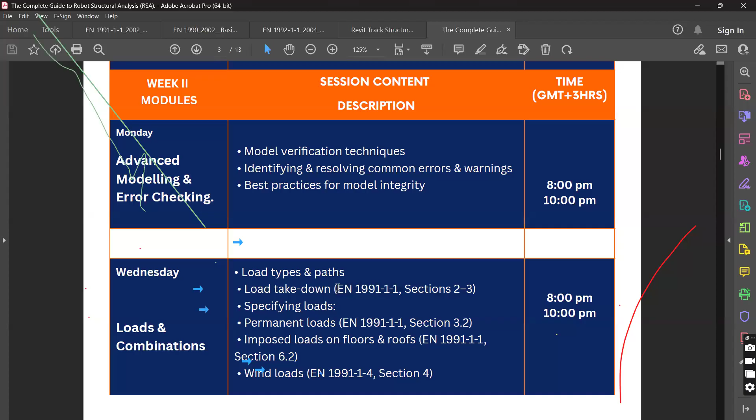A well streamlined course from modeling to, for example, load combinations. Where do they come from? We might be having fresh graduates. What are these different codes that people keep talking about and referring to? So you'll be able to get where the floor loads come from, the partitions, the different live loads, the wind pressure, how we simulate it, and how all those different loads, the dead loads, the live loads, the wind loads, combine in order to have a combination that you're going to tell the software to analyze.

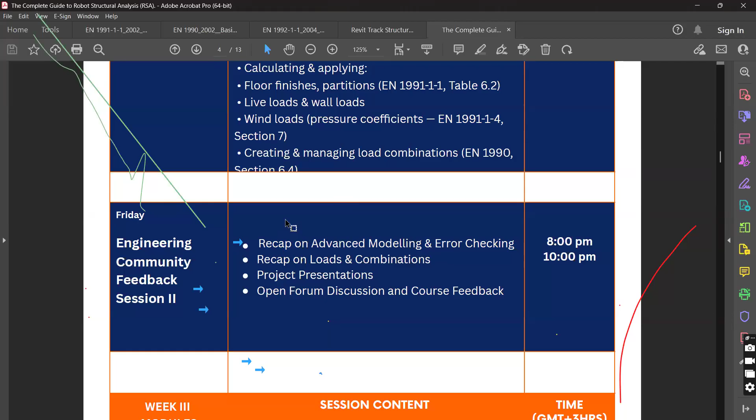Those 1.35 and the 1.5, we shall all understand how and where they come from, where they are applied, and how the results look like. So this is what you will cover.

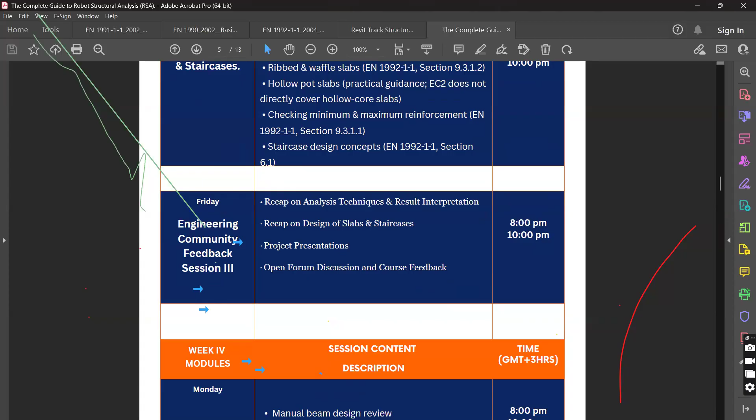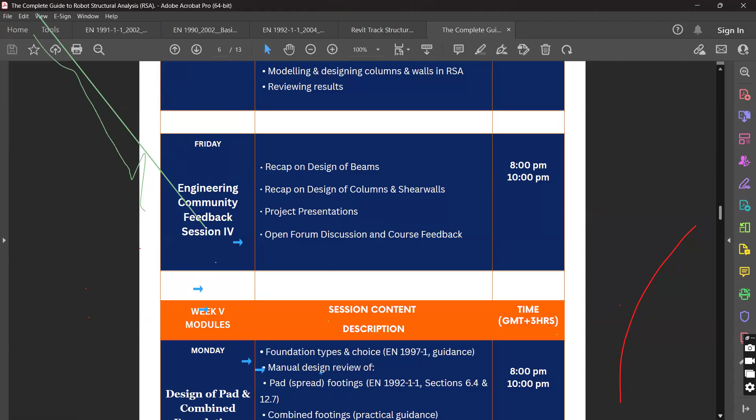So everything from modeling to analysis to how you visualize the different elements. I've rushed through, for example, beams, columns. We shall go into the detail, how a column is positioned, how you decide its orientation, depending on the moment it is carrying in the different axes, the X and Y, because that is what governs the positioning of the columns. We shall go into the depth.

You remember when I was modeling a slab, I told you to uncheck that parameter that is tied to foundations. We shall go into the depth of how Robot models, for example, a footing that is in contact with soil, because it has a lot of parameters that come into place.

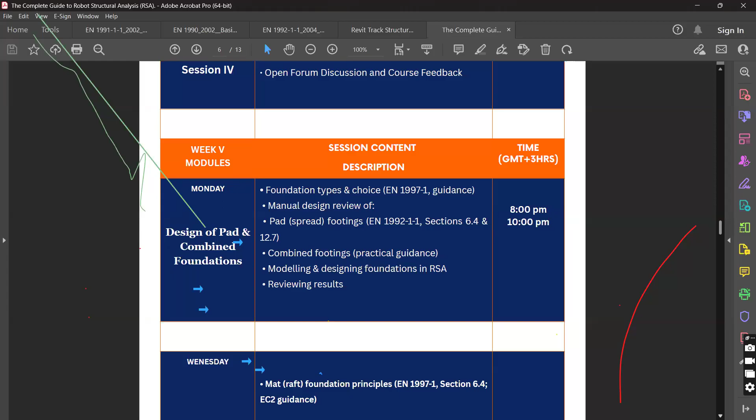The size, the soil profile that is down, its bearing capacity, all that are captured, and it models your foundation as a spring. So that is the portion I unchecked because it would capture the floor slab with that spring analysis.

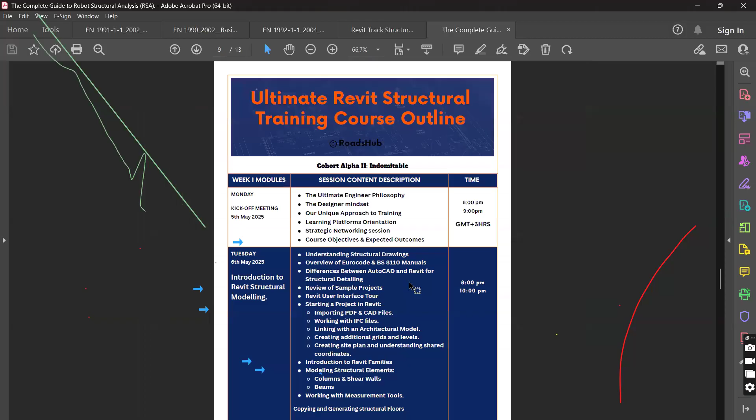So we shall do the different mats. We look at how the different foundations, the mat, we shall cover all these. So we have a detailed program. As I said, we can't cover the entire Robot in 2 hours.

So now whatever you output, because Robot and Revit have that collaboration, I remember one of the engineers mentioned it. If you've been in different design firms, you have a person that does the drafting, the detailing. But now with Revit and Robot, you can model in Robot, take it to Revit and you do all the detailing. And as you know, Revit is a BIM software, it's a building information modeling software. That is where you get to collaborate with different engineering fields.

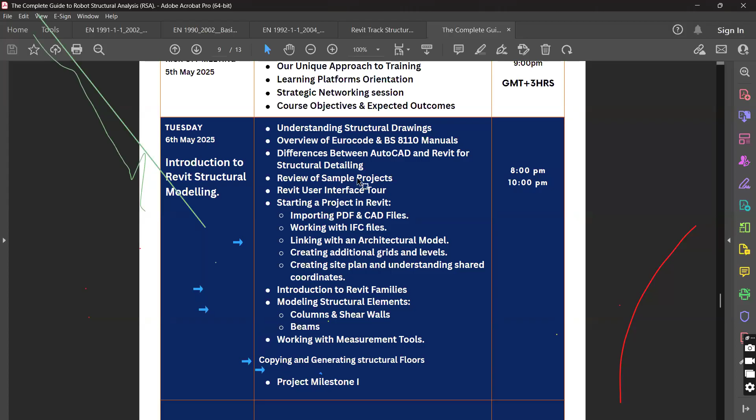The plumbers, the electrical engineers will be able to collaborate within your model, and you'll be able to detect where clashes are, where a pipe maybe is intended to pass through a beam. You'll be able to see all that within Revit. And that is the collaboration part, that all parties, wherever they are in different countries, can work on the same model in real time and be able to streamline and detect wherever there are clashes. That is the BIM environment.

So whatever we've modeled, we shall be able to export it and see it in Revit and bring out all the details, what you have imagined, what you have detailed, the reinforcement you've designed, you'll be able to visualize it. And that is where Revit comes in. We no longer draw lines to represent a rebar. If the rebar is T20, it will come as T20, not just a line drawn, for example, that we used to do in AutoCAD. You detail a slab, you just draw a line, point to it that this is T16. In Revit, if it is a T16, it will come as a T16.

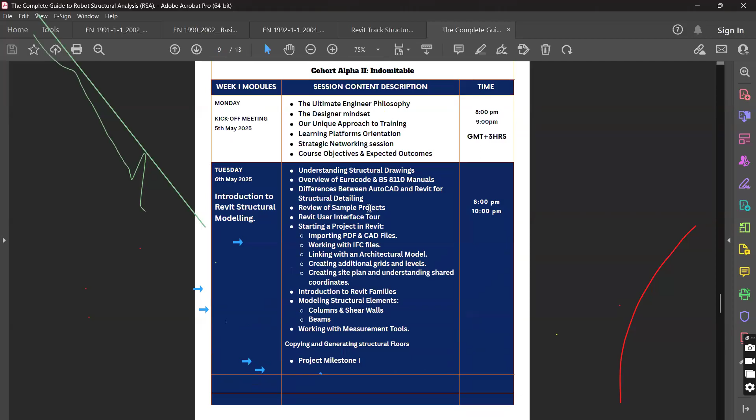So I will just check. I know Engineer Gatimo had. Engineer Gatimo, are you still there? I know he had. Hello, engineer. I am back. All right. I'm done with a few things. You can give us some few remarks. I've not looked at the chat. I don't know if you tried to answer some few questions. Yeah.